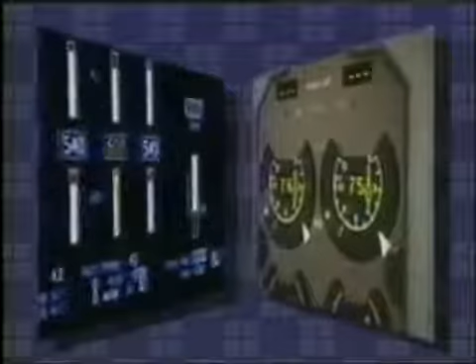Over the last several years, data has indicated some pilots have attempted to diagnose aircraft malfunctions prior to establishing control of the aircraft. This has occurred despite the fact that all pilots are taught to fly the aircraft first. So why does the data indicate that they have not done this? One of the main reasons is the startle factor.

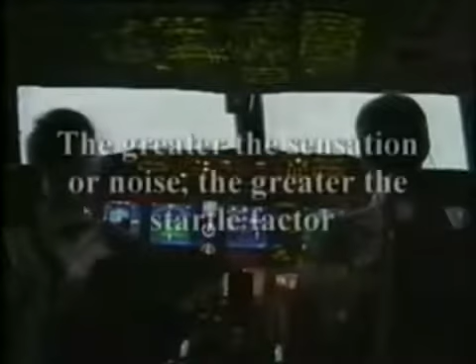Because of modern aircraft's high reliability, when a malfunction occurs, it is frequently the first time the flight crew is exposed to the true sensations of that malfunction. While simulators have greatly improved pilot training, they've not always realistically simulated the actual noise, vibration, and aerodynamic forces certain engine malfunctions cause. It also appears that the greater the physical sensations the pilot feels during the malfunction, the greater the startle factor. And the greater the likelihood the flight crew will try to diagnose the problem immediately instead of flying the aircraft first.

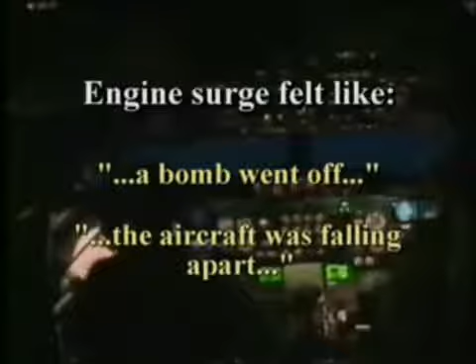When flight crews are interviewed after engine malfunction events, such as the surge of a large high-bypass engine during initial climb-out, they make very similar comments regarding the event. Pilots will often report that it felt like a bomb went off, or that the aircraft was falling apart. Each time an event occurred, the sound and the feel of the event were different, and often much more intense than indicated by any training the crews had received.

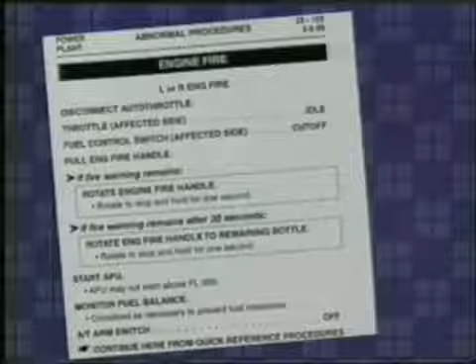Because of this, the flight crew either did not recognize the engine symptom or was so concerned about the engine that they responded without taking time to correctly evaluate the situation. In each case, additional time spent in stabilizing the airplane's flight path before responding to the engine symptom would have avoided a serious event.

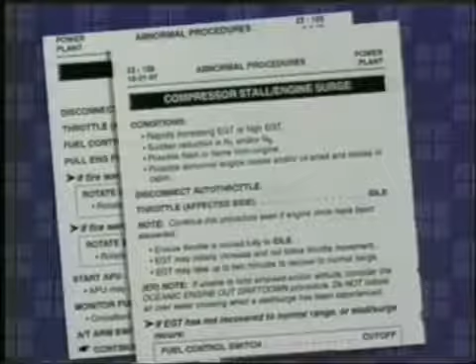Remember, all transport category aircraft are designed and certified to be controllable with the most critical engine failed. Unlike early turboprops, turbofan-powered airplanes do not require immediate pilot action to the engine in the event of a single engine malfunction or failure. Once the flight path is stabilized, the engine malfunction may be safely identified and the appropriate checklists executed. Taking the time to stabilize the flight path may sometimes lead to further engine damage, but despite that, the airplane still has the capability of safe flight.

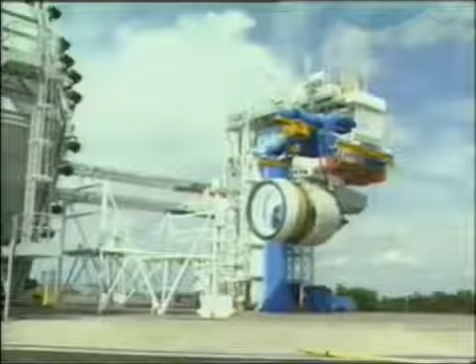Engines are tested during initial certification to demonstrate ruggedness following bird and ice ingestion. Even after a major failure, such as the loss of an entire fan blade, which is an extremely rare event, the engine shuts down safely and the airplane is still airworthy.

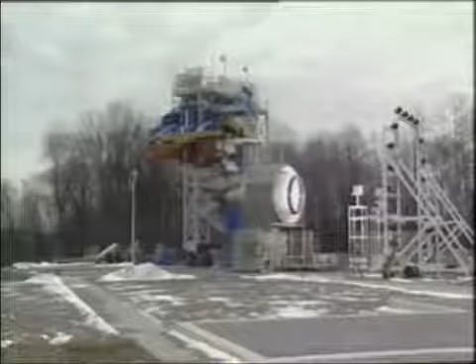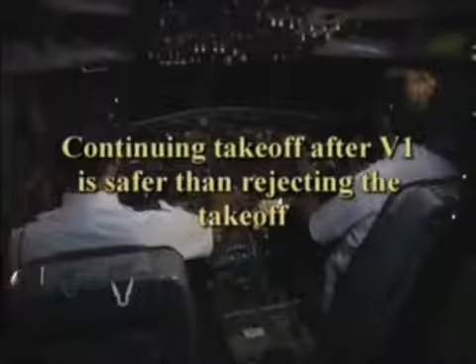Service history of fleet aircraft verifies that there are generally no engine failures requiring an instant engine shutdown in order to maintain airplane safety, and that continuing a takeoff after an engine failure at V1 is safer than rejecting the takeoff. So, the capability to recognize turbine engine malfunctions must be learned.

But how? The objective of this video is to provide pilots with information to help them recognize and identify various engine malfunctions that have led to inappropriate crew responses and accidents in the past. These malfunctions include fire warnings, tailpipe fires, bird strikes, vibration, engine surge, severe engine damage, and slow power loss.

In each case, the first priority is to employ the basic stick and rudder inputs necessary to maintain aerodynamic control of the aircraft. Remember, fly the airplane and then identify and respond to the engine malfunction when time permits.

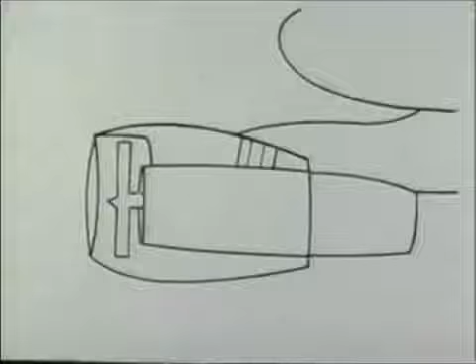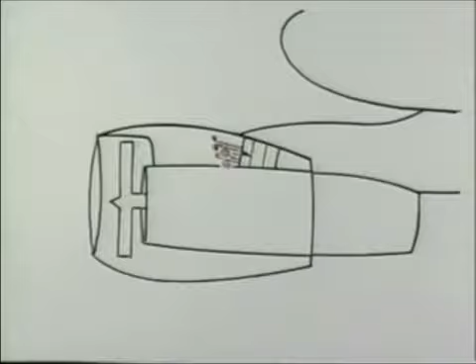Fire warnings result from excessively high temperature in the space between the engine casings and cowling or from fire detection system malfunctions. The heat source may be an actual fire around the engine, an engine failure allowing core air to escape through a hole in the casings, or a leak of hot air from a bleed duct. Whenever a fire warning occurs, the first priority must be to fly the airplane. Once the airplane is stabilized, attention should then be directed toward execution of the appropriate checklist.

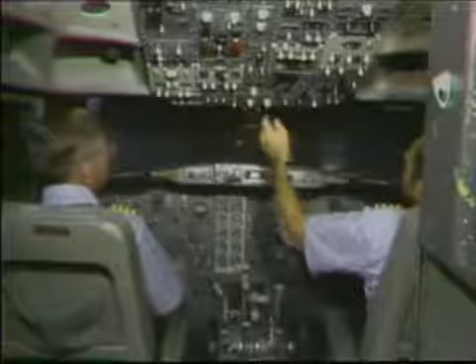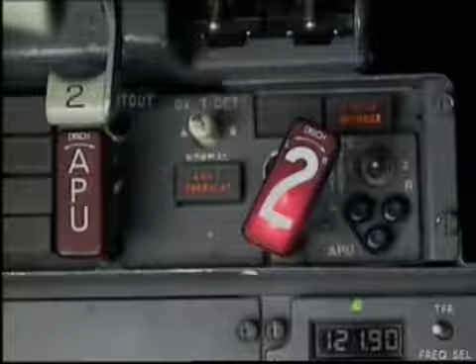Even if there is an actual fire, there is adequate isolation between the airplane structure and the nacelle to ensure sufficient time to establish and maintain airplane control to a safe altitude. Taking this time may cause further fire damage within the nacelle, but accident reports consistently show that flight path control must be focused on first, and it must remain a high priority until landing.

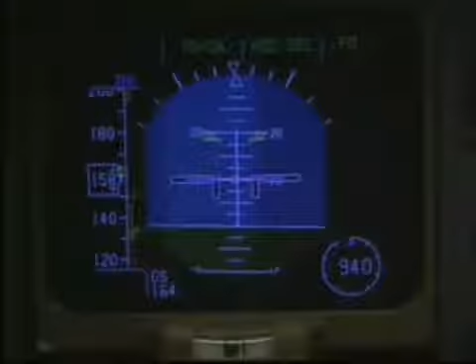Engine torching, or tailpipe fires, mostly occur during an abnormal engine start, but they may also occur after shutdown or during other ground operations. Although there may be no cockpit engine instrument indication, these events can be very spectacular when viewed from the ramp or cabin, and have been confused with an actual engine fire. The torching may be of short duration or it may last for several seconds. Note that the flame is confined to the tailpipe.

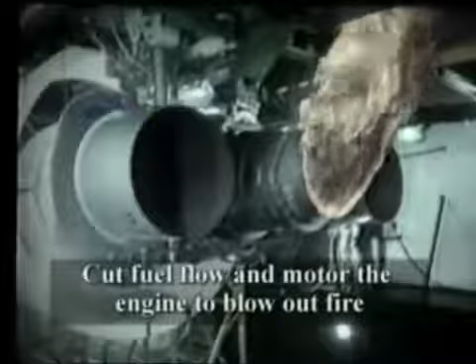Flames may turn upward and threaten the wing if no airflow is maintained through the engine, and in some cases, an EGT increase may be indicated on the flight deck. Simply cutting fuel flow while continuing to motor the engine normally extinguishes the flames. The flight crew depends on ground personnel to identify engine torching.

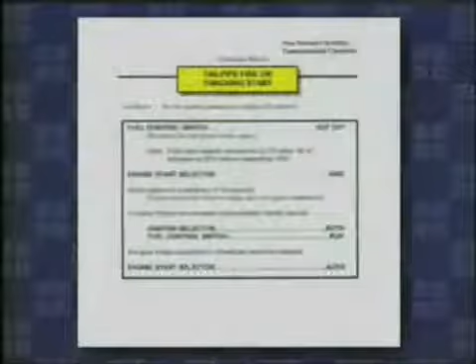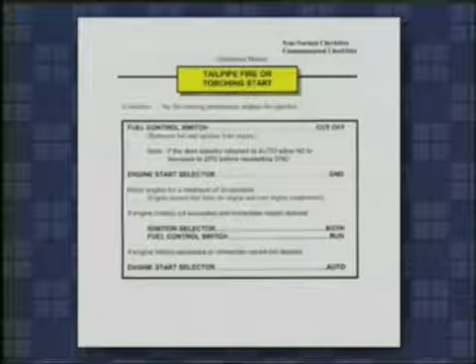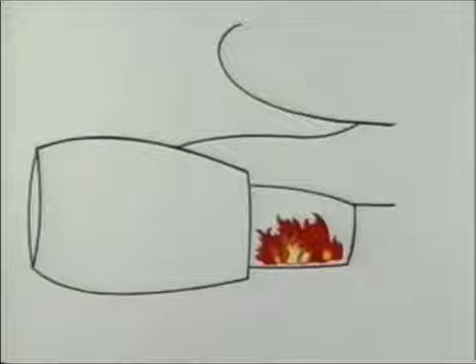If you are told of an engine fire without any flight deck indications of a fire, follow the engine torching procedure as outlined in your flight manual. This procedure will direct you to motor the engine and extinguish the flames. The regular fire procedure will not. Do not perform the engine fire procedure unless a fire warning indication occurs. Executing the regular fire procedure may disable bleed air to the engine starter and prevent you from being able to motor the engine to blow out the tailpipe fire.

There have been cases where flight attendants or passengers have initiated evacuations due to engine torching. These unnecessary evacuations can be minimized by prompt flight deck and cabin crew coordination to provide passengers with pertinent information and to alleviate their concerns.

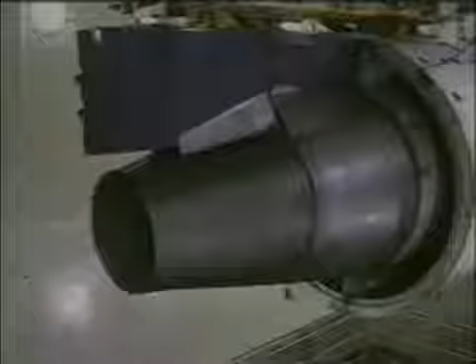Bird strike is a concern for every pilot. The birds may be observed by the flight crew, or the first indication of a bird ingestion may be an engine surge. Flocking birds are a particular concern since they can affect more than one engine. It may be difficult to see the birds and to know how many engines have ingested birds.

V1, rotate. Birds. I check the birds. Come on, baby. Keep flying. Keep going now. Keep flying. Positive rate. Yeah. Come on, baby. That's it. Nice job. Fly the airplane. There's 400 feet. Okay, what's the problem?

Most bird strikes occur close to the ground, at the very time when there is least opportunity to appraise the situation. Nevertheless, the record shows that establishing flight path control first before taking action on the engine is a more successful strategy than taking immediate action with the engine.

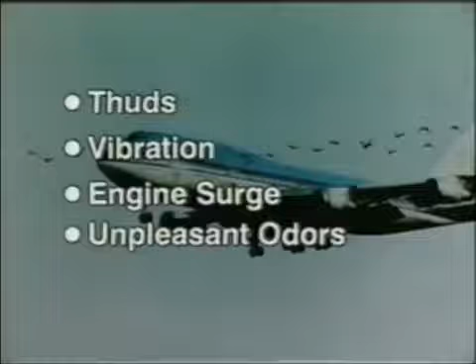There have been accidents resulting from bird strike-related rejected takeoffs above V1 speed, and in each case, the airplane was in fact safe to fly. Therefore, rejecting a takeoff due to a bird strike at speeds above V1 is not considered to be appropriate. Bird ingestion by an engine may be accompanied by audible thuds, vibration, engine surge, unpleasant odors, and abnormal engine instrument readings such as high EGT.

Throttling back an engine may be needed to clear a stall after the airplane has been placed on a stable flight path. If the engine involved cannot be positively identified, do not shut it down. In the unlikely event of multiple engines surging, prompt action may be required to clear the stall on the engines one at a time to assure that some power is available later.

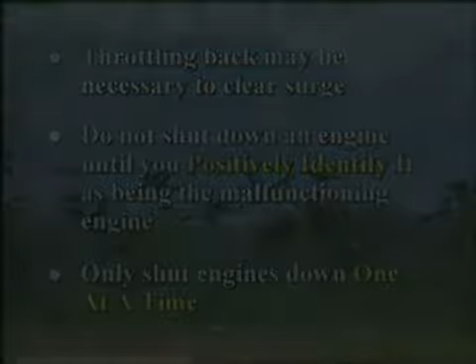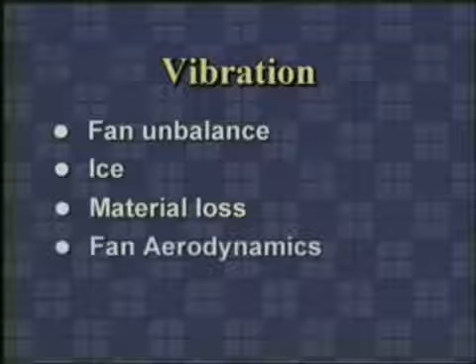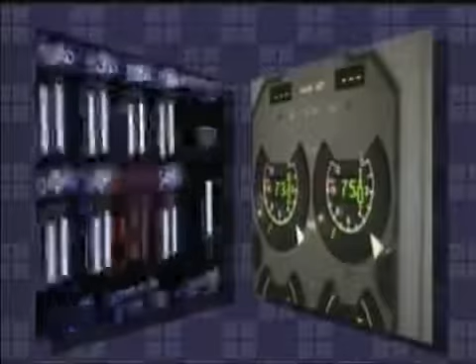Engine vibration may be caused by a fan unbalance. This can come from ice buildup. It may also come from fan blade material loss or aerodynamic excitation from blade distortion due to foreign object damage. Vibration can also come from internal engine failure such as a bearing failure. Cross-reference of all engine parameters will help to establish whether an engine failure actually exists. Engine-induced vibration felt on the flight deck may not be indicated on instruments.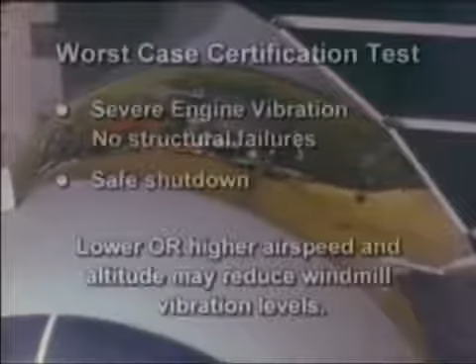For some engine failures, severe vibration may be experienced after the engine has been shut down to the point where instruments are difficult to read. This vibration is caused by the unbalanced fan, windmilling at an engine speed close to an airframe's natural frequency, which amplifies the vibration. Changing airspeed and/or altitude will change the fan windmill speed, and an airplane speed may be found where there will be much less vibration. There is no risk of an airplane structural failure due to vibratory engine loads during this windmilling action.

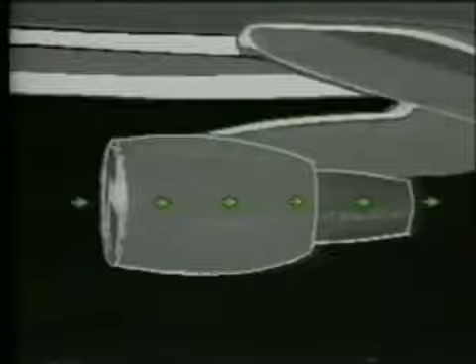From a flight crew member's perspective, one of the most startling events is the engine surge or stall on takeoff or during flight. An engine surge is, in the simplest terms, the breakdown of the airflow in a turbine engine. When the compressor blades stall, they are no longer able to force the air through the engine from front to rear. Now the high-pressure air in the middle of the engine can escape explosively from front and back simultaneously.

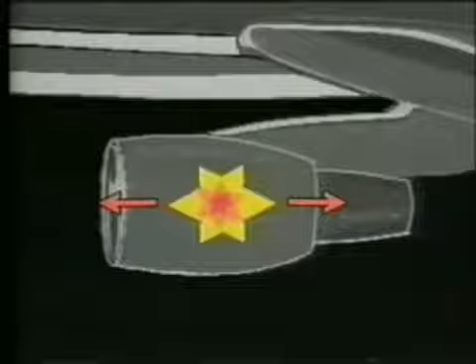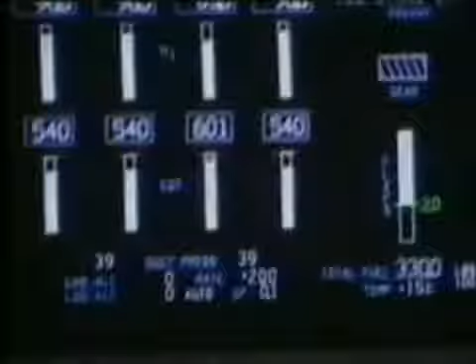Usually there are visible flames from both ends of the engine, accompanied with one or more very loud bangs. This violent airflow reversal will produce an instant loss of thrust and an immediate yaw that will literally spill most of the coffee from your cup. This yaw is accompanied by a vibration that cannot be duplicated in the simulator.

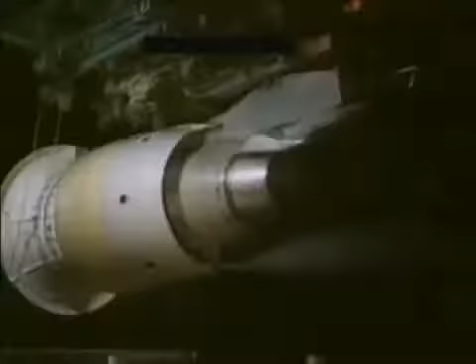Bird strikes, internal engine failures, engine pneumatic bleed malfunctions, or internal engine clearance changes can cause a surge. It is usually a problem in the compressor system and so is often referred to as a compressor surge or compressor stall. The magnitude of the symptoms, such as the loudness of the noise and the severity of the vibration, vary with the power setting and the type of instability in the compression system. Low altitude and high power settings produce the loudest bangs and the most violent yaw and vibration.

High altitude surges are frequently associated with engine power changes during leveling off or when initiating an altitude change. High altitude surges generally result in a muffled noise, light vibration, and increasing EGT, and may require power reduction to clear the condition. Some surges allow the engine to recover with no flight crew action. Others recover after flight crew action to reduce power. The most severe surges are non-recoverable. When the engine recovers by itself, it is best to just fly the airplane and not interfere with the engine.

Identification of a recoverable compressor surge or stall condition based on engine parameter fluctuations or changes alone can be difficult, due in part to the fact that the event is usually over in the blink of an eye. Generally, most flight crews identify the condition as an engine malfunction when the EGT exceeds its limits or the EGT gauge turns red. If EGT continues to rise following a surge, the thrust lever should be retarded to allow the engine to recover. Then, after the engine recovers, power should be reapplied slowly.

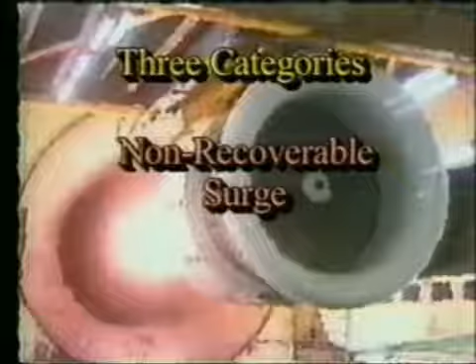If the engine does not recover or the EGT remains out of limits, then a shutdown of the engine may be the logical choice depending on the operational situation. Your flight manual and checklists identify the specific procedures to follow. Remember that an engine at idle still provides power for airplane systems and creates less drag than if shut down.

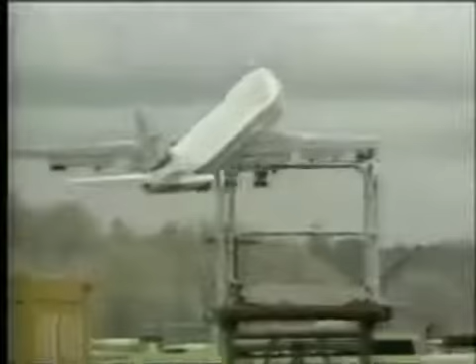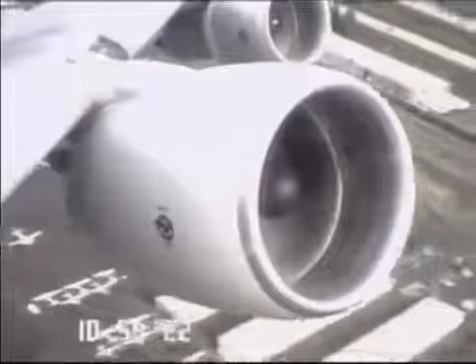There have been numerous occasions where a high-power compressor surge has occurred during the takeoff roll or initial climb-out, and the flight crew was notified by the tower that an engine was on fire. As a result, the flight crews accomplished the engine fire checklist and shut down the engine, even though there was no fire warning annunciated in the cockpit. The tower saw fire out the inlet and tailpipe, and their information regarding seeing flames outside the engine was correct, but an engine shutdown was not necessary since this was not actually an aircraft fire.

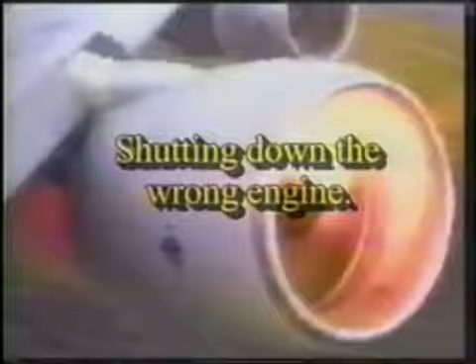While the likelihood of high-power engine surge is rare, the startle factor associated with loud bangs and airplane vibration has led to instances of inappropriate action such as rejecting the takeoff after the V1 speed, shutting down the wrong engine, improperly executing the failure climb profile, or failing to comply with established ground tracks to clear rising terrain. Only take action to address the surge after stabilizing the flight path.

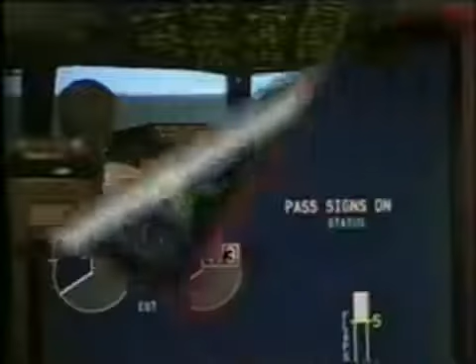Recent interviews with pilots who have experienced high-power compressor surge malfunctions during takeoff and initial climb have revealed that they have initially thought that a bomb had exploded, or that they hit a truck, or had a mid-air collision. Remember, no matter how loud the bang, airplane control is always the first priority.

In the event of a major internal engine failure resulting in severe engine damage, there may be a variety of symptoms on the flight deck: fire warnings, engine surge, vibration, high EGT, fluctuating RPM, oil system parameters out of limits, and thrust loss. Any one of these symptoms alone could be from a more benign malfunction, but multiple symptoms are a good indication of severe engine damage, and visual inspection by the cabin crew can be very helpful in confirming this.

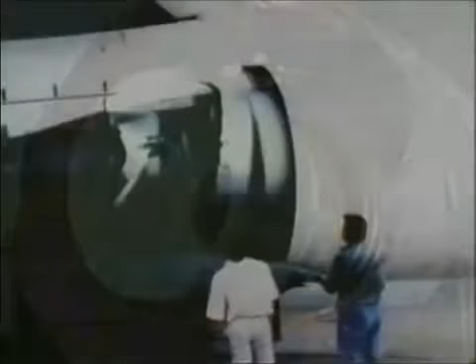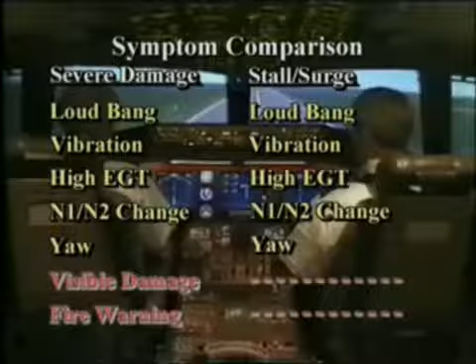Visual symptoms may include flames, smoke, or visible damage to engine cowlings. It may not be possible to distinguish initially between an engine surge without damage and one accompanying severe damage. The symptoms of the two kinds of events can be very similar, and from an operational standpoint, it is not important to know immediately which of the two has occurred. If it does become necessary to shut down the engine, wait until you positively identify the engine you select as actually being the malfunctioning engine.

It should be noted that even an engine which may show signs of visible damage and visible flames may very well be producing useful power necessary for initial climb out. Again, the first priority is to fly the airplane, not the engine. After you have positive control of the aircraft's flight path, then identify and secure the affected engine when time permits. Diagnosis of exactly what caused the engine problem is neither necessary nor safe if it diverts resources from flying the airplane.

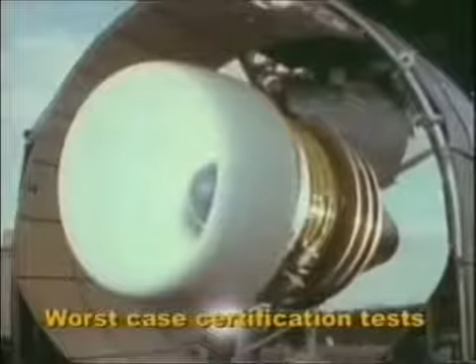The malfunctions discussed so far have compelling cues, such as loud bangs, vibration, and warning or advisory messages. In each case, the challenge is to fly the airplane without being distracted by very compelling or alarming engine symptoms. The last type of malfunction to be discussed here is more subtle: slow decay of thrust, or non-response to power lever. These can be subtle in fact to the point that it can be completely overlooked, with potentially serious consequences to the airplane. If an engine slowly reduces power, or when the thrust lever is moved the engine does not respond, then the airplane will experience asymmetric thrust.

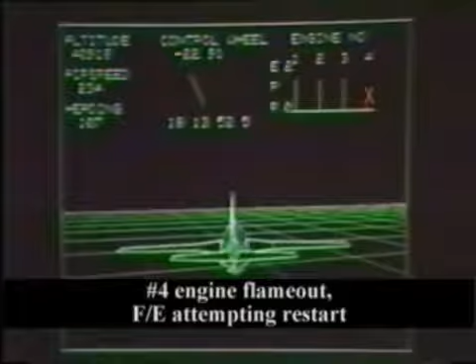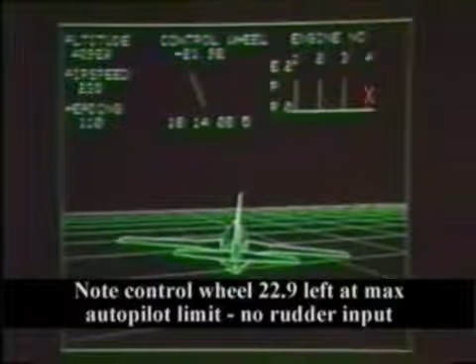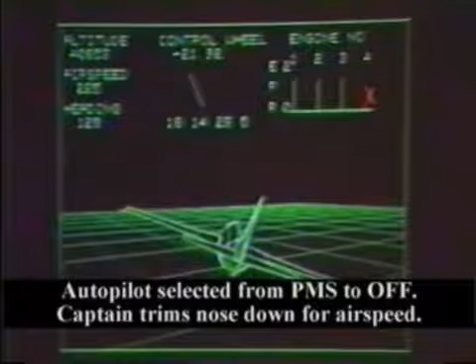The problems will most likely develop at a point during the flight when the autopilot is engaged. The autopilot will compensate for the asymmetrical thrust on its own. It takes an alert flight crew to recognize the situation that's developing. If the airplane is badly mistrimmed when the autopilot is manually disconnected, or when the autopilot reaches the limits of its authority and automatically disconnects, only seconds remain before an unusual attitude is encountered. If no external visual references are available, such as flying over the water at night or in IMC, the likelihood of an upset increases.

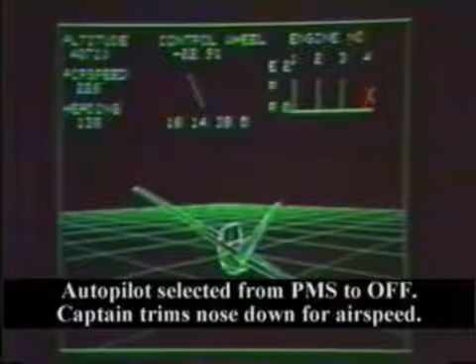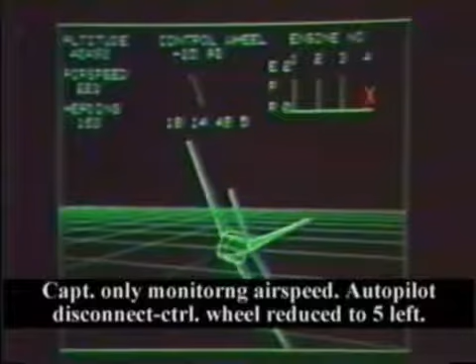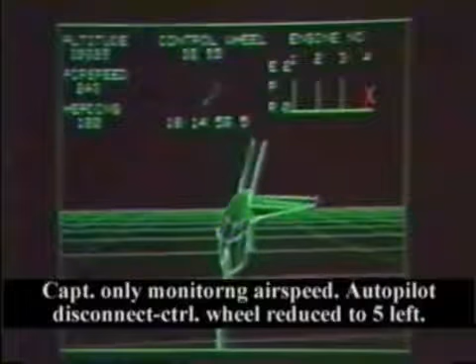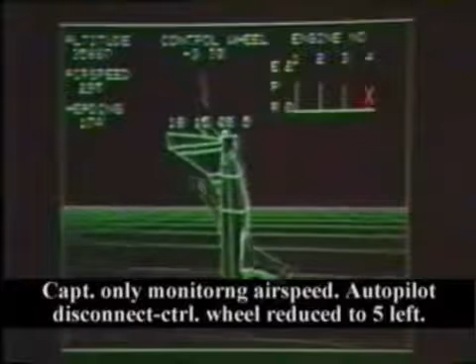This condition of low-power engine loss with the autopilot on has caused several aircraft upsets, which were not always recoverable. Flight control displacement or trim input indicators may be the only obvious indication that the autopilot is trimming the aircraft away from coordinated flight. Vigilance is required to detect these stealthy engine malfunctions and to maintain a safe flight attitude while the situation is still recoverable. But a slowly changing asymmetric thrust problem is not an easy one to detect. Symptoms may include multiple system problems such as generators dropping offline, low engine oil pressure, unexplained airplane attitude changes, and significant differences between primary parameters from one engine to the next.

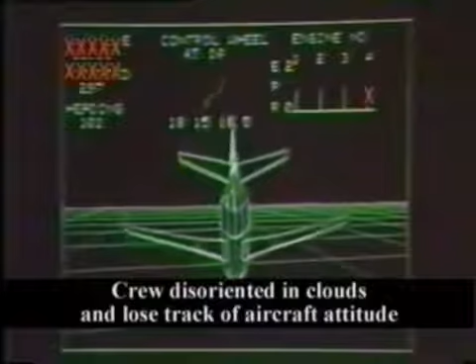If asymmetric thrust is suspected, the pilot must be prepared to make immediate rudder or trim inputs to avoid an uncommanded aircraft roll. The first response must be to make the appropriate rudder input or trim adjustment. Disconnecting the autopilot without appropriate control input or trim adjustments may result in a rapid roll maneuver. Different aircraft from different airframe manufacturers display different types of indicators to the pilot regarding the amount of trim the autopilot may be adding to the system. Consult your flight manual and training department to gain a full understanding of how your particular aircraft provides visual, audible, or tactile indications of the amount of trim being added by the autopilot.

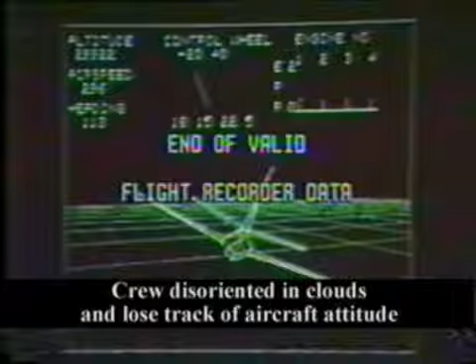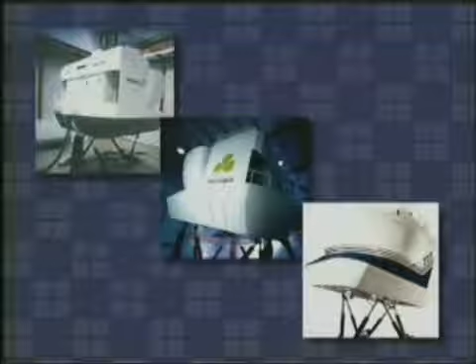The sequence of events and severity of symptoms experienced during an engine malfunction may vary from the events shown in this video and from those experienced in a simulator. Engine malfunctions vary from one event to the next. The failures shown here were selected as relatively severe, but not the most severe that have ever occurred. Simulation of failures may be limited by simulator capability, which may not permit realistic levels of noise and vibration symptoms. Industry is currently addressing these concerns to enhance the simulation realism for such failures.

This video is intended to provide general information on the characteristics of some high bypass engine failures and malfunctions. It is not intended to be an in-depth study of all possible engine failure modes. Specific remedial action to be taken in the event of an engine failure is published in the Airplane Flight or Operating Manual.